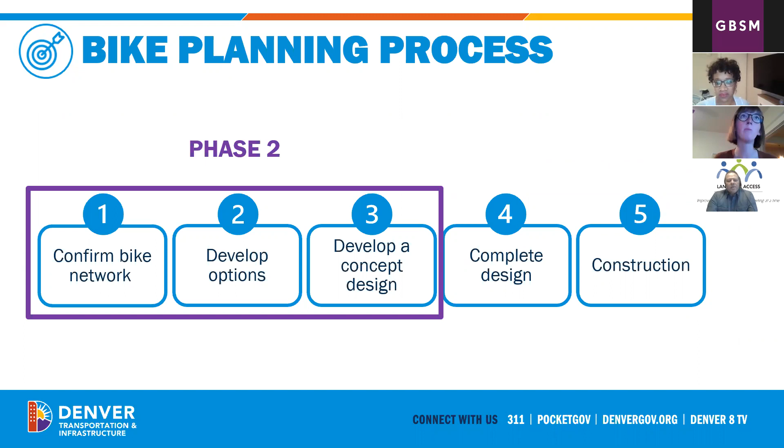Really quickly, we want to walk through some of the high-level milestones that we've already reached in the program and where we will continue to head as we move forward.

The South Central Community Transportation Network began in the spring of 2020. From there, projects began the network verification process, where again we were looking to make sure we were investing in the right corridors, making the right improvements in the right places.

Phase 1 projects then moved into developing and finalizing concepts. Earlier this year, those phase 1 projects moved into the refinement of design phase, where they will move towards complete design. Phase 2 projects began in the developing the concept phase and network verification.

So today we are here in Q2 of 2021. We're having a public meeting to discuss where we're at on the phase 1 projects as they move towards final design, as well as give an update on what we heard in the concept surveys for phase 2 projects.

As we look ahead, we do anticipate coming back to our stakeholders and the public later this summer or fall as phase 1 projects near implementation and phase 2 projects have concepts developed and are moving towards final design.

Just want to highlight some of the public engagement statistics we've done to date through this program. We began this process with an interactive map tool that was citywide. We gathered multimodal feedback, over 1,300 data points, which led into the network verification process, as well as identifying multimodal improvements throughout the 3 networks in Denver that are moving forward today.

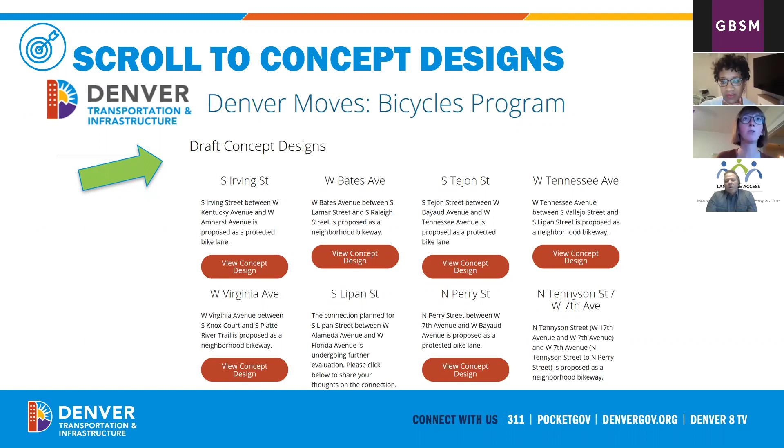This is a really good opportunity to get input and make sure we're looking at the right improvements in the right places on these corridors. You'll see all of the designs available here. You can click on the red buttons, which will take you to the individual project page, where you can read more background information about the corridor and learn about the different designs proposed along it.

From here, you can use the embedded map that's part of the page, or if you're having trouble loading it on your desktop or phone, we have a button that says mobile-friendly design. It's the same thing, just a different way of viewing it that's sometimes easier to load than the red button.

You can either click on the map that shows up on the screen, or click the red button, which takes you to the same map where you're able to scroll around, zoom in, zoom out, look at the designs, and click anywhere to leave a comment. You're also able to like other people's comments and respond to them as well.

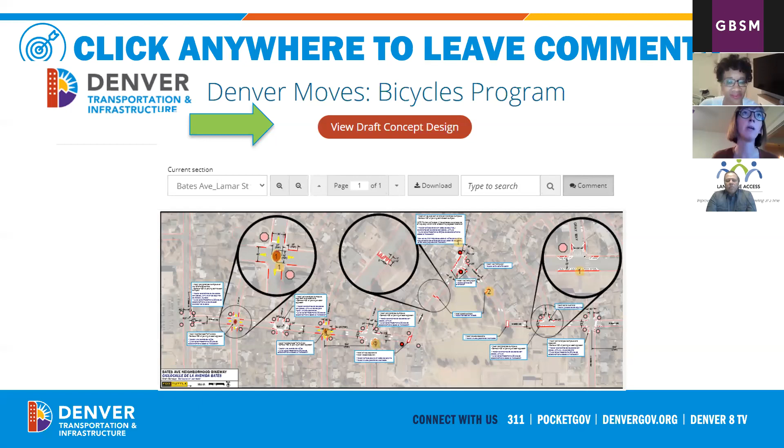So it effectively extends our community meeting time and allows folks to really dig into the concepts on their own time, because it is a lot of corridors. We have 11 that we'll be talking about this evening, and that will be on Konveio for the next 2.5 weeks.

So with that, I just wanted to hand off now to our consultants to speak about the phase 1 projects that are anticipated to begin installation as soon as later this year in 2021. These phase 1 projects are in phases 4 and 5, so we're refining and completing the design as we move towards construction.

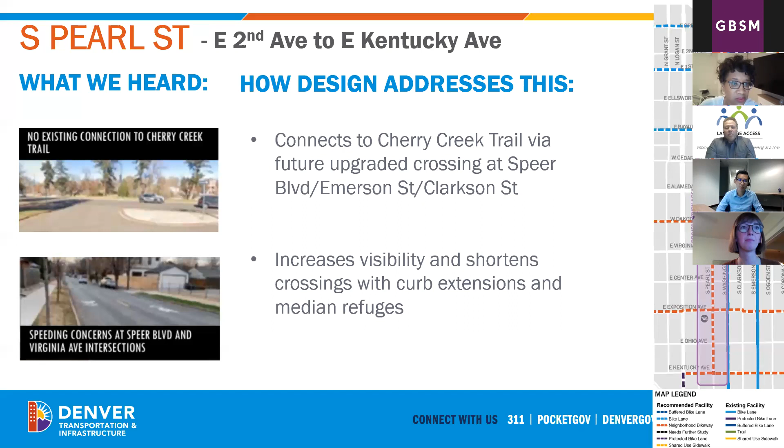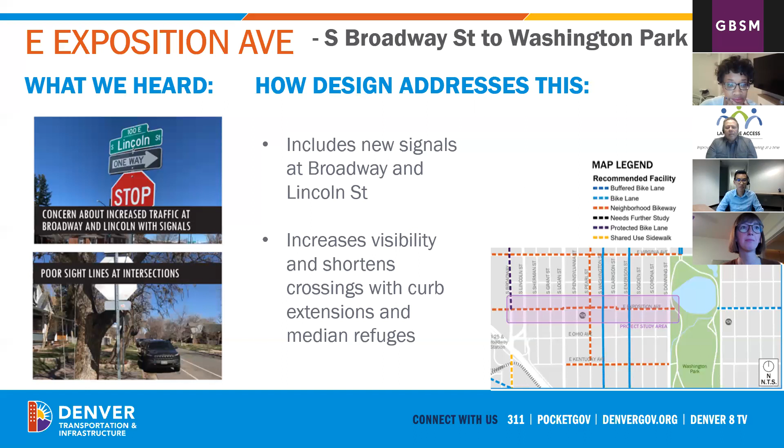So the design includes a traffic diversion to basically maintain Exposition Avenue as a neighborhood street. In addition, we also included traffic calming treatments and curb extensions to manage traffic volumes and speeds. The curb extensions also make it easier to see and be seen at intersections and to cross the street.

And then finally, for the next project I'll talk about, Kentucky Avenue is just south of Exposition Avenue. One of the exciting things about this project is the potential for it to connect and provide a connection across I-25.

This project in particular is just Kentucky Avenue between Logan Street and Wash Park. But there will be a future connection that we're currently working on that will include Logan Street and Mississippi Avenue to connect down to the future neighborhood bikeway on Sherman Street.

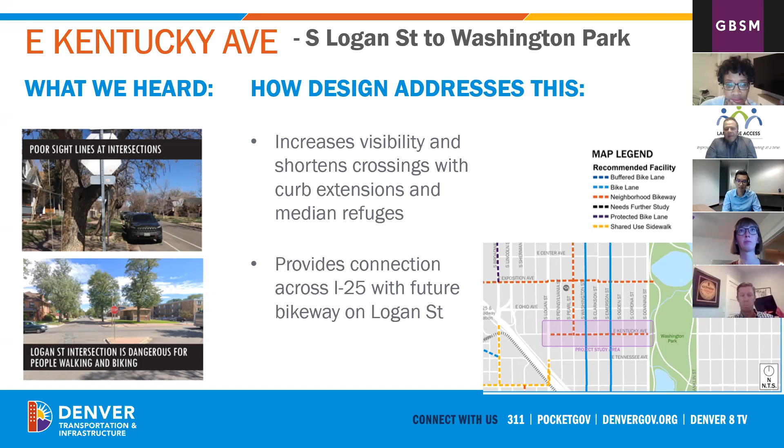Like the other neighborhood bikeway projects such as Pearl Street and Exposition Avenue, the design includes traffic calming and curb extensions to make it easier to travel along and cross the side streets when traveling along Kentucky Avenue, whether you're a bicyclist, a pedestrian, or a driver.

Thanks, Trung. I'm going to continue through a couple more corridors, similar to what Trung was talking about, starting with East 7th Avenue. This is from Broadway all the way to Williams Street, just south of Cheesman Park, so it's a pretty good stretch.

One thing to point out is that we have two different segments here. We have the 7th Avenue Business District, which is going to be more of a dedicated bike lane, and then we also have a neighborhood bikeway segment that runs from Pennsylvania all the way to Williams Street.

I'll hit a couple highlights. One of the things the safety data is telling us is that there's been both bicycle and pedestrian crashes at the intersection of 7th and Sherman. So our design has incorporated a median refuge island and curb extensions there to reduce motor vehicle speeds and increase visibility for all roadway users at that intersection.

So really making that a safer crossing, and then also facilitating a crossing across 7th, but also to Broadway on a dedicated bike lane. Because one of the things we additionally heard a lot about was making sure there's a clear connection to Cherry Creek in this area of the city.

Initially we looked at going south on 7th, south on Sherman all the way to 6th, but that became a pretty big challenge, so we decided to look at creating a connection via Broadway. We have a short-term solution that connects to the sidewalk and through the plaza to the Cherry Creek trail, and the long-term improvement is happening with the Broadway cycle track, which will be constructed in 2022.

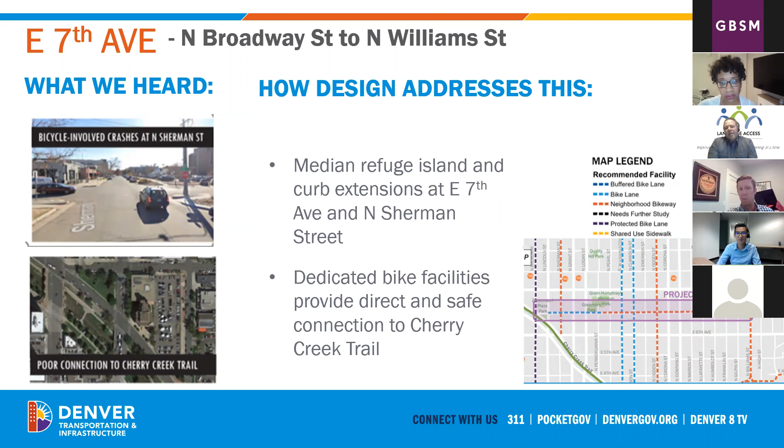Next, I want to hit on Franklin Street. Franklin Street runs from Cheesman Park all the way north to 21st Avenue, providing a great connection through North Capitol Hill.

One of the things we really heard about on this specific corridor is that the crossings of 13th and 14th are very challenging for people to navigate. What we did there was two things.

We looked at curb extensions on 13th and 14th to shorten the crossing distance for people on bicycles and people walking. It also helps daylight those intersections a bit to allow all roadway users to be more visible.

The other thing we wanted to do is reduce the volume of traffic along this corridor to create a neighborhood bikeway segment, taking what the Cheeseman Park Road is like and extending it north up to Colfax, really trying to slow down the street and allow it to be more comfortable for folks biking and walking.

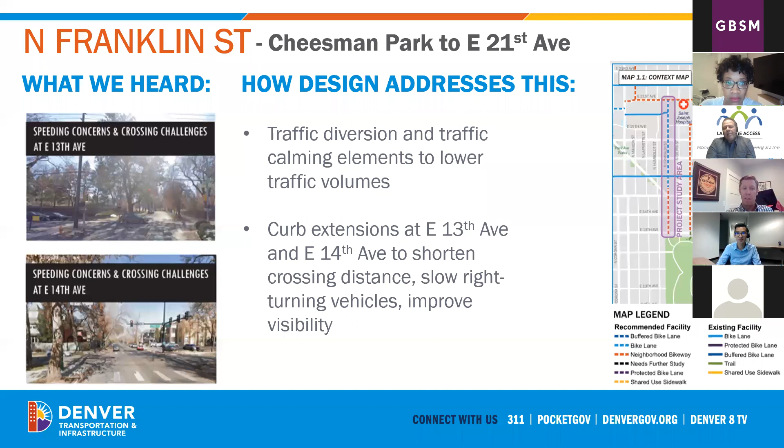Finally, I'm going to talk about North Sherman Street. This is the North Sherman Street that starts south of the Capitol and goes all the way to 7th Avenue, really tying into the 7th Avenue bikeway there.

One of the things the community identified was speeding and crossing challenges associated with the larger intersections here, specifically 8th Avenue and Sherman. Our design addresses these concerns through the addition of curb extensions.

We're also implementing a new traffic signal at 8th Avenue, because if anybody's actually crossed there, they know that with the amount of people trying to get to Speer Boulevard, traffic sometimes queues across that intersection and the gaps can be very difficult. This will really help create a protected crossing for people walking and biking, and people driving as well.

And finally, I wanted to point out that the safety data does tell us that there have been multiple pedestrian crashes at 12th Avenue and Sherman. So what we really did was look at providing curb extensions along this corridor. As many of you know, this is also a transit corridor, so we were a little bit limited in what we could do because we still want to facilitate a multimodal intersection. But what that will do is really reduce traffic speeds and also daylight that intersection.

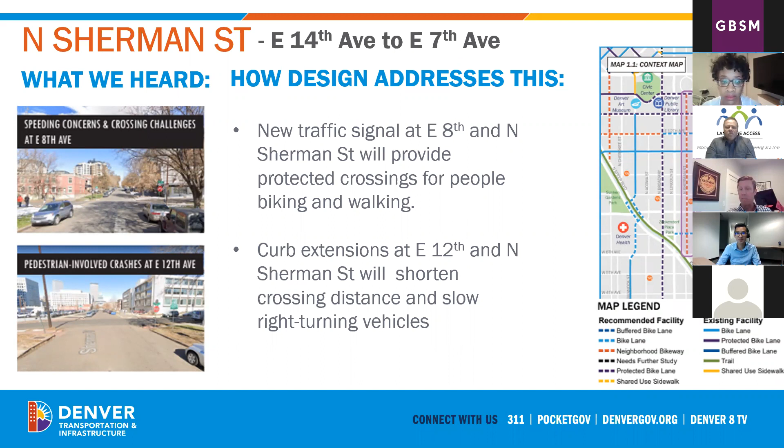Now it's time to hear from Matt. Thanks, Josh. I'll be taking us through our last couple corridors before we continue with the rest of our meeting. I'm going to start with 13th Avenue.

13th Avenue is proposed to be a westbound protected bike lane, providing a connection between the existing protected bike lane at North Lincoln Street and North Grant Street to the east, connecting through the Capitol Hill area. Throughout the planning process, we heard concerns about speeding and sight distance issues, and we observed high bike and pedestrian crash rates at the Lincoln and Grant intersections.

The proposed designs help address the speeding and sight distance concerns by repurposing an existing travel lane to be a protected bike lane. This will help slow speeds along the corridor and also provide enhanced safety for all roadway users. At larger intersections, clear definition of space will help make movements more predictable and make vulnerable users more visible.

Lastly, I wanted to note that a bike signal with a separated bike phase and conflict pavement markings is proposed at the intersection of Lincoln. This will give bicyclists dedicated space at the intersection and a separate time to cross to remove any conflicts there.

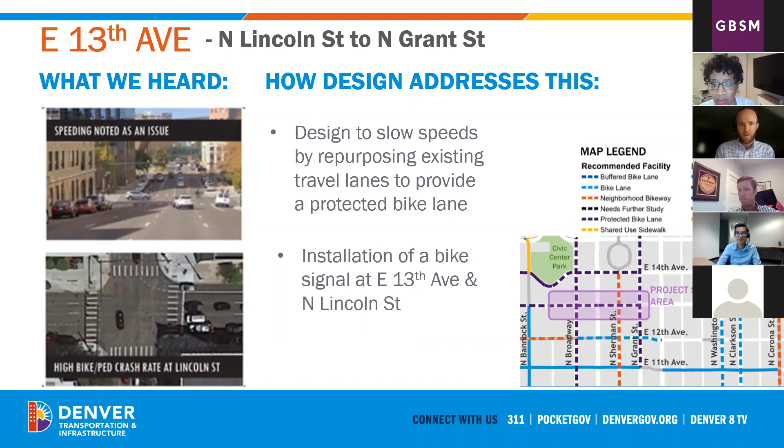Moving on to 14th Avenue, this is pretty similar in scope to the 13th Avenue project. It's going to be an eastbound protected bike lane connecting the existing PBL at the Denver Art Museum and continuing east to Grant Street, again through the Capitol Hill area. The concerns we heard during the process on this one were related to high bike and pedestrian crash rates, as well as red light running at the Lincoln and Grant intersections again.

So the design approach here is again similar to 13th, repurposing an existing travel lane to be a protected bike lane to slow speeds and provide enhanced safety. At larger intersections, a clear definition of space is going to help make the movements more predictable and increase visibility. For this corridor at Broadway, that looks like a separated bike lane from the turning movements for the eastbound approach, which will help provide a dedicated space for bicyclists and additional safety and comfort at the intersection.

And then at Grant Street, bikes will have a protected crossing of 14th Avenue to continue north on the existing side path along the west side of North Grant Street.

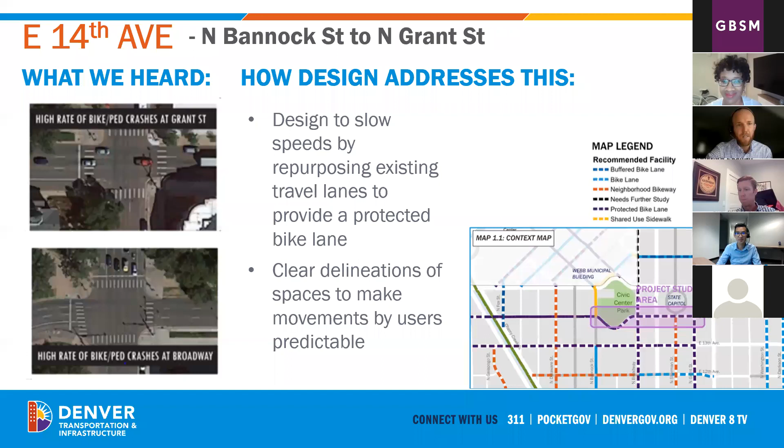So the next corridor we'll be looking at is Bayaud Avenue. Bayaud Avenue is going to be an east-west neighborhood bikeway extending from North Cherokee Street on the west to North Downing Street on the eastern limits. As you may know or have been out on yourself, this corridor operates as a shared street as part of the city's program implemented last year, and it's already had some installments and improvements this year to help make the feel of the shared street more permanent.

During our planning process, we heard concerns about difficult crossings at larger intersections like Broadway and Lincoln, and also concerns about speeding and traffic volume. To address these, we're looking to implement traffic diversion and traffic calming elements along the corridor. The traffic diversion will help maintain the feel of that shared street, and traffic calming elements like curb extensions and a neighborhood traffic circle will help reduce speeds throughout the corridor. These improvements will all combine to help improve visibility and daylighting at the intersection and help define spaces for all users.

Lastly, continued efforts are ongoing for evaluating the signal timing and further traffic diversion at some of the difficult crossings.

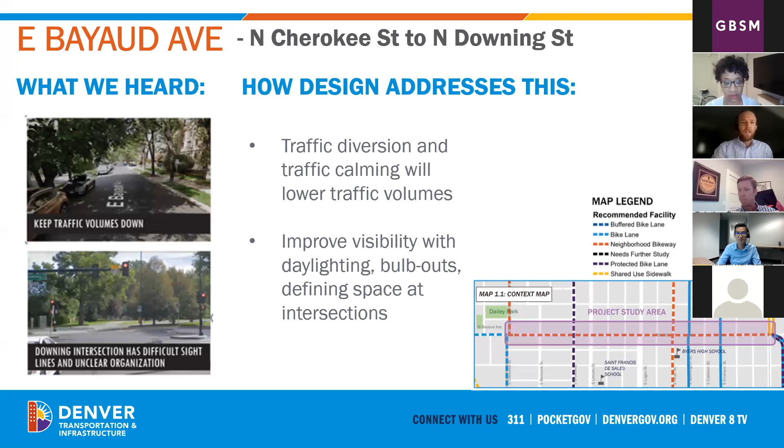The next corridor is South Cherokee Street and West First Avenue. This corridor is proposed to be a combination of a buffered bike lane and a neighborhood bikeway.

Throughout the planning process, we heard concerns about visibility at intersections and difficult crossings, speeding, and feedback concerning the removal of on-street parking. To help address these concerns, we wanted to evaluate the appropriate facility type along the corridor.

The Baker Neighborhood Transportation Master Plan had already been completed and recommended this facility to be a buffered bike lane for the entire extents. But based on our analysis of existing conditions along the corridor, it was recommended that the corridor be a buffered bike lane for the southern half and a neighborhood bikeway for the northern half, with the barrier being at Bayaud Avenue.

Implementation of the correct facility type along the corridor helps us get better management of speeds and repurposing of space along the roadway, and installation of traffic calming elements like curb extensions helps provide a more comfortable feel along the corridor as well.

All of that is to say that we're looking to increase the visibility at the intersections and really define space for the users.

Lastly, implementation of a neighborhood bikeway on the northern half of the facility has an added benefit of not only being the appropriate solution for the speeds and volumes out there, but also maintaining the existing on-street parking, which is used as a good traffic calming element for adding friction and reducing speeds along the corridor.

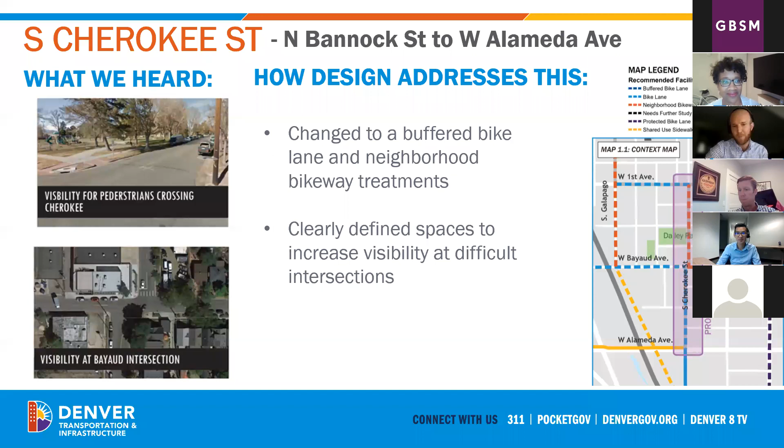The last corridor I'll mention is North Galapago Street. This is proposed to be a neighborhood bikeway from West 3rd Avenue up to West 13th Avenue.

The biggest feedback that we received was about difficult crossings, particularly at 6th Avenue, and also about speeding throughout the corridor. The cross section there is really wide, and so it invites faster speeds throughout the corridor, and that's something we wanted to pay a lot of attention to.

To help address these concerns, we recommend implementation of traffic calming elements like curb extensions throughout the corridor to really slow people down, particularly at the intersections, and reduce speeds there. At some of the bigger intersections like 6th, 8th, and 13th, a clear definition of space helps make movements more predictable and vulnerable users more visible.

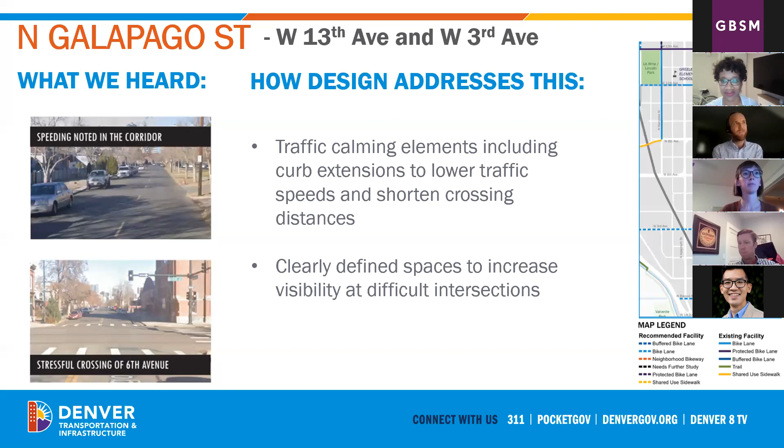And so Ellen's gonna take it from here. Actually, thanks, Matt. I think it's my turn, or is it? Oh, no, sorry, not quite yet.

Thanks, Vanita. I appreciate everyone bearing with us as we walked through the high-level elements of each project that is currently available on Konveio.

Again, I just want to highlight that the actual designs, the 60% designs, are available on Konveio for your feedback. Please go to that website. We dropped it in the chat so you can just click that link. Feedback closes May 14th, in about 2.5 to 3 weeks.

While we walked through the major aspects of what we heard and what we'd be doing to incorporate that feedback, all comments that we receive on Konveio on these designs will also be reviewed by the team and incorporated as we head towards final design and then construction for these projects.

So with that, I know that there have been several questions asked in the Q&A box, so we'll stop for our first question and answer session, and I'll pass it to you, Vanita. Now it's my turn. Thank you.

Well, thanks, Ellen. If you haven't entered your question in the Q&A box, please take a moment and do that now. I'd like to start with a question that came in from Matt. That question to you, Ellen, is who is making the designs, and have they observed or surveyed the neighborhood and intersections in person?

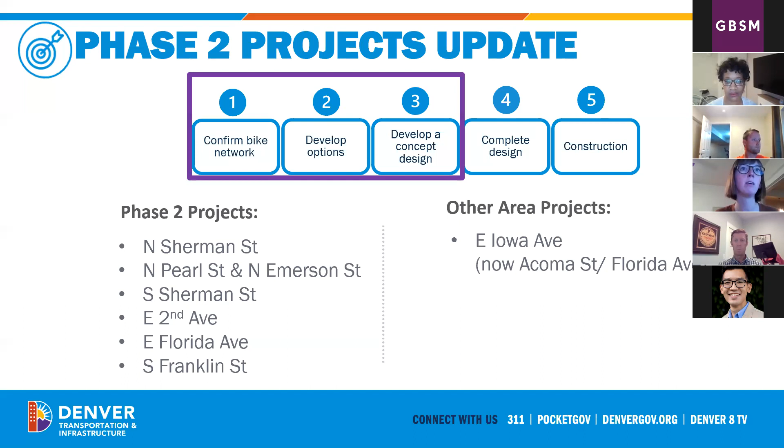So with that, I'll hand it off to Josh to speak about the concept survey results for these phase 2 projects. Thanks, Ellen—you can keep going if you'd like. Sounds great, but I'll jump in right here.

I just wanted to point one thing out again: the point of South Central is to create a connected bicycle and pedestrian network in the area. I wanted to note that before we get into the results of the concept surveys for these phase 2 projects.

The first one is North Sherman, from 20th all the way to Colfax. What we really heard on this corridor is that the main interest is improving crossings, especially at the bigger intersections like Colfax, 17th and 18th. We also heard that many people use this for commuting, coming in and out of downtown or the North Cap Hill and Uptown areas. One interesting thing was that we saw a lot of people using scooters and bike share responding here, so we're getting a fair amount of people using micromobility these days as well. Moving on now to Pearl Emerson.

Just to remind everyone, the Pearl Emerson and 11th alignment is from 20th to 3rd Avenue. This is really the early implementation of a north-south corridor that's looking at replacing the Washington-Clarkson alignments we looked at in the network verification. But we heard during the initial concept survey that there would be too much parking removal on those corridors to move it forward right now. It's still something the city is looking at down the road.

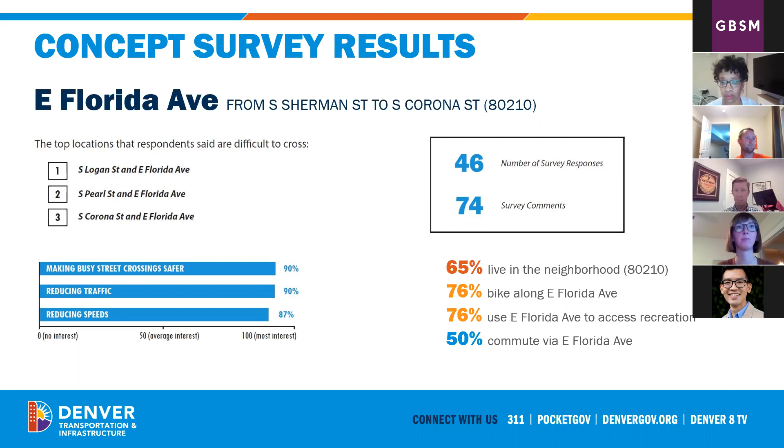I'll talk a little more about how Florida will come into play with the new alignment for East Iowa that Ellen talked about earlier. And finally, I want to talk about South Franklin, another north-south connection from Buchtel all the way down to Dartmouth Avenue.

So basically the southern limit of Denver, a pretty long corridor. Again, there was strong interest for improving crossings, especially at bigger streets like Yale, Evans, and Buchtel. We also heard a fair amount of people tell us they use this corridor for recreation, commuting, and getting to school—so a good mix of uses. We want to improve it for all users along the corridor.

So I want to take a quick break there and move to Iowa. I want to talk a little more about Iowa Avenue. Like Ellen mentioned, this was part of a repaving project that started early. But as we got into the alternatives analysis process, we realized there were quite a few constraints in getting across Broadway and connecting to Sherman.

I won't go into too many details, but we didn't feel there was a safe alternative that allowed bicycles to get from the future construction of the Iowa underpass to Platte Park and also to the North Sherman or South Sherman neighborhood bikeway.

So what we really wanted to focus on here is how we looked at an alternative alignment. Instead of taking Iowa all the way to the east, we looked at going up north, South Acoma Street to Florida Avenue, which would also cross Broadway and connect to the East Florida and South Sherman neighborhood bikeway. This would include an improvement on Broadway to get people across that street safely.

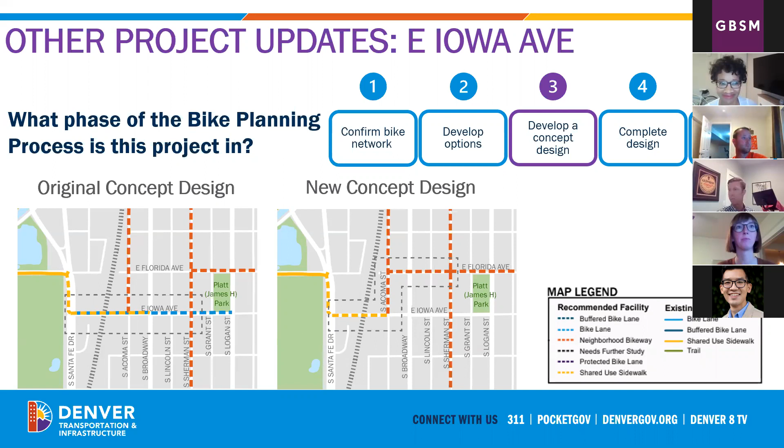Thank you, Josh. I'd like to start our next round of questions going to Bryce. Bryce, there's a question about road surface—question 18 in our Q&A box. The question's from James: What is being done to ensure the road surface of these targeted routes is safe, free from potholes and depressions, poorly covered valve covers or manhole covers that swallow bike wheels and cause crashes?

Yeah, sure. Thanks for the question, James. Something we do in design is walk every corridor from beginning to end, and we look for things like that. We can report them to street maintenance. We're typically not going to do those fixes as part of our project, but we will report them to street maintenance. That's something anyone can do as well by submitting a 311. It's hard to catch every single pothole, so if you see one, call 311—it will go straight to street maintenance and they'll be able to handle it.

Thank you so much, Bryce. I want to come back to you for question 11. Is the design of the traffic diversion at Emerson and Bayaud going to be reevaluated? Currently, it does not divert traffic successfully like it does at Bayaud and Lincoln.